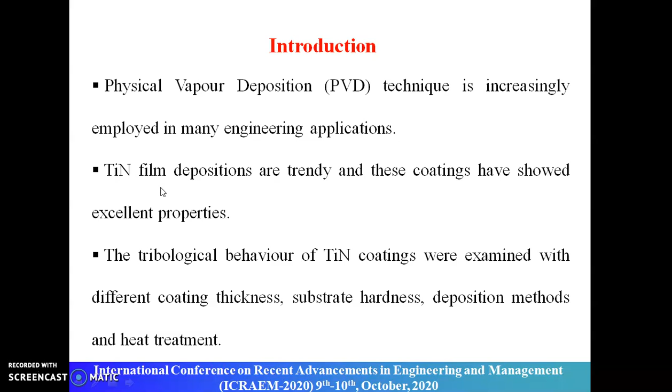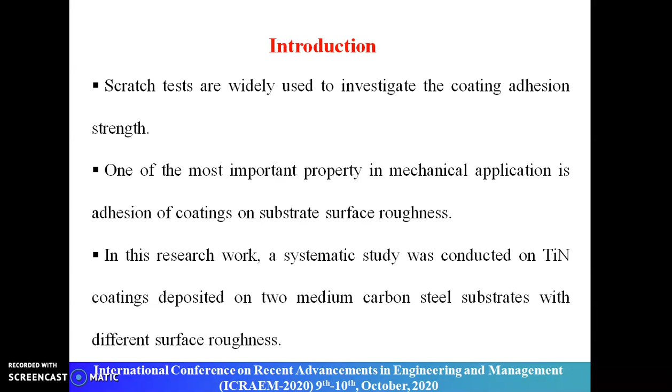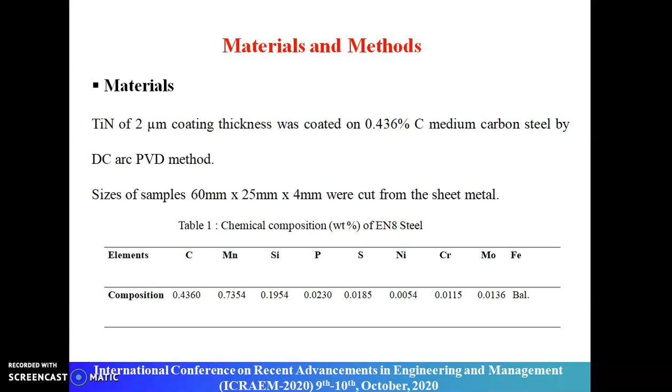Moving to the next slide is materials and methods. The actual chemical composition of the steel substrate, that is EN8, has been analyzed with the help of an optical emission spectrometer of Thermo Electron equipment. The chemical composition of the substrate is reported in the table. Here are the results. Moving to the next slide, for the deposition of coating, the composition of targets used, coating thickness and the summary of the process parameters are represented in Table 2. Here are the details of the deposition of titanium nitride coatings on EN8 substrate materials.

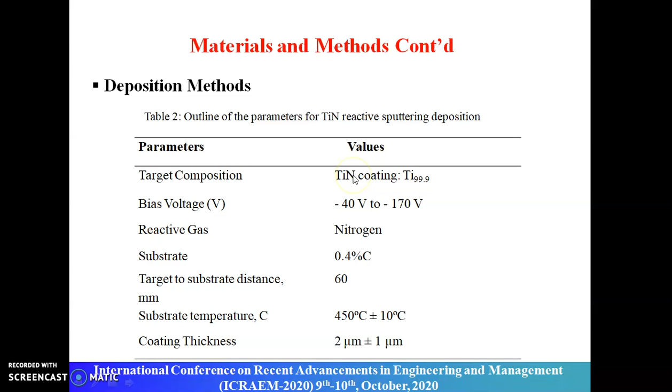In the next slide, a Zeiss Axiovert 200 MAT optical microscope was used to identify the microstructure of the substrate and coated material. In this figure, the Ducom scratch tester TR101 equipment was used to scratch the coated part. The stylus has a 0.2 mm tip radius, Rockwell C spherical diamond indenter. The stylus was drawn across the coatings with a loading rate of 10 Newton per millimeter and sliding speed of 1 millimeter per second.

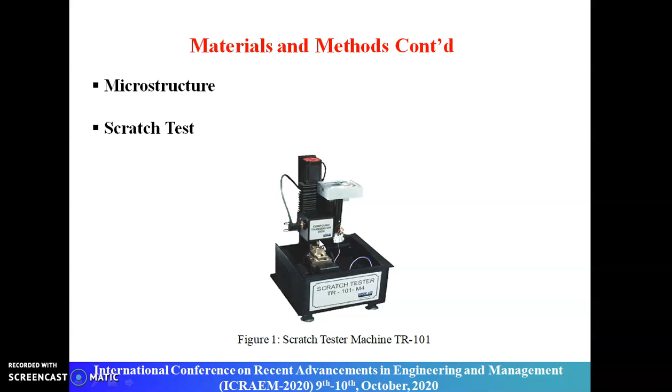Moving to the next slide. The optical micrographs of the substrate and titanium nitride coatings are depicted in figure 2. 2A shows the microstructure of EN8 steel. The lighter portion is ferrite structure and the darker portion shows the pearlite structure. Whereas the titanium nitride coating is gold yellow in color, that is figure 2B.

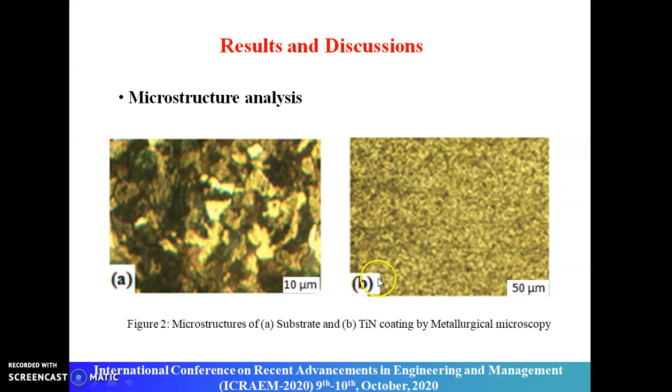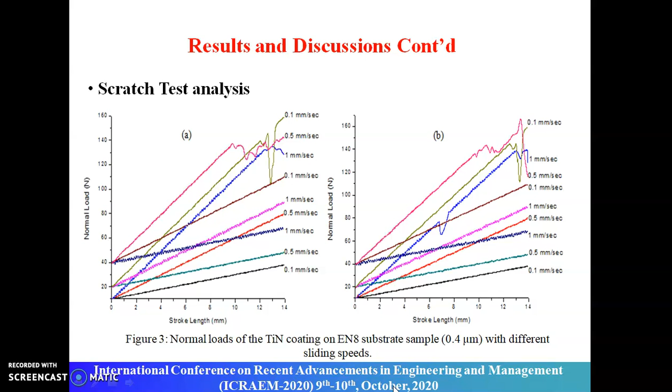The present investigation shows that the bonding strength of the coating increases with the decrease in the substrate surface roughness. The coating adhesion obtained on lower surface roughness, that is 0.4 micrometer, was superior to coating adhesion obtained on the higher surface roughness substrate, that is 1.2 micrometer.

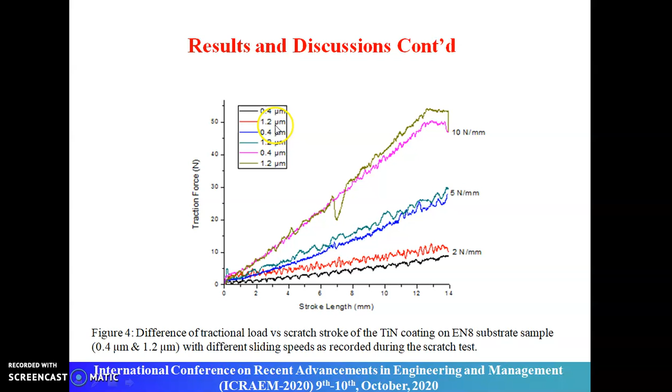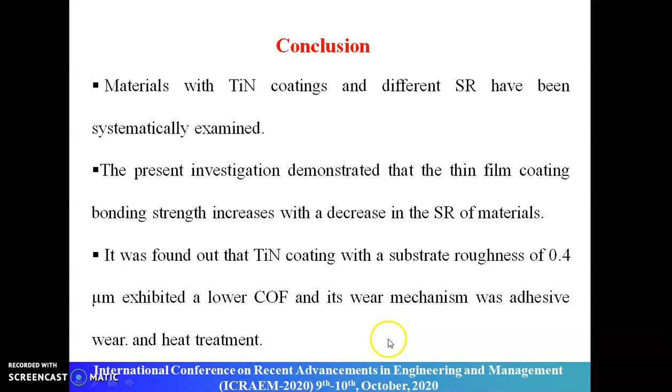In the conclusion part, materials with titanium nitride coating and different surface roughness have been systematically examined. The present investigation demonstrates that the thin film coating's bonding strength increases with a decrease in the surface roughness of materials. It was found that titanium nitride coating with a substrate roughness of 0.4 micrometer exhibited a lower coefficient of friction and wear. And here are some of the references.